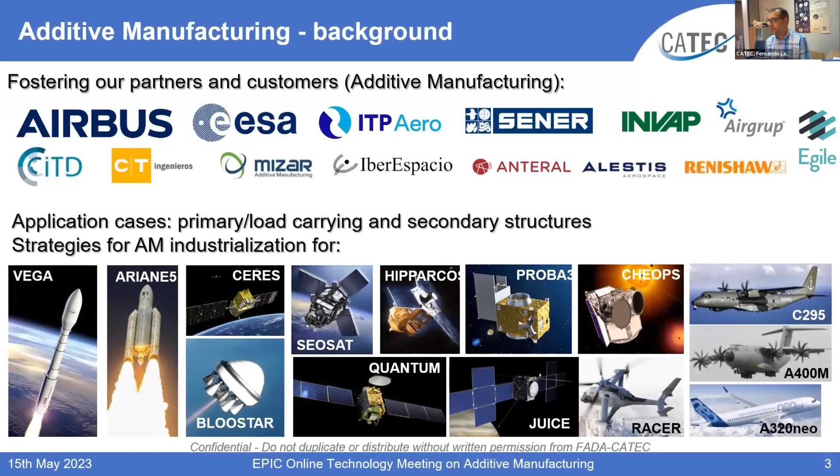As I said before, many for launcher applications, satellites, and also spacecraft. In the first projects, we were working on the validation and qualification of the technology, also producing functional demonstrators which have been validated at a high TRL. With this experience, we started to manufacture flight hardware, a few of which I will present today, not only in space but also in the aeronautic industry.

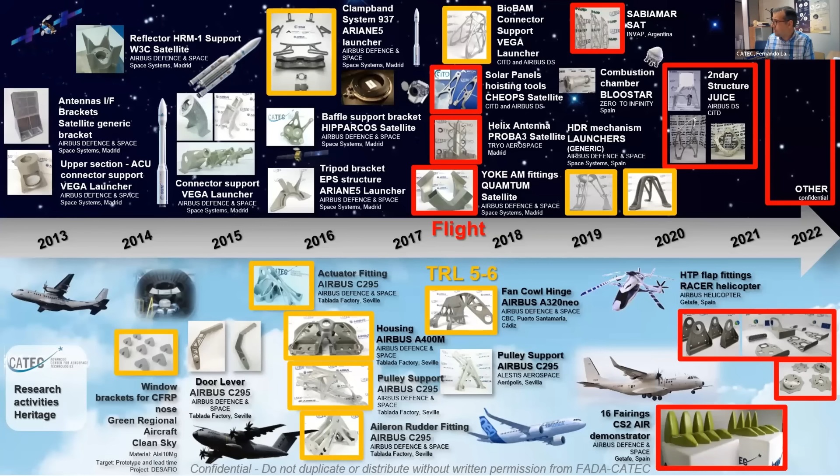For the last one, for instance, the first critical parts introduced in an Airbus rotorcraft were manufactured in the framework of a European project. Titanium parts belonging to the HTP fittings of the tail unit of the helicopters, also some other parts belonging to the secondary structure, or for instance different fairings for the Clean Sky 2 demonstrator, which is a modified C295 aircraft assembled here in Seville at Airbus facilities.

So where we are talking about additive manufacturing, of course there are many different processes. It's not only the manufacturing steps, it's adapting the design for all the process steps and the inspection as well. That's where we have a huge expertise.

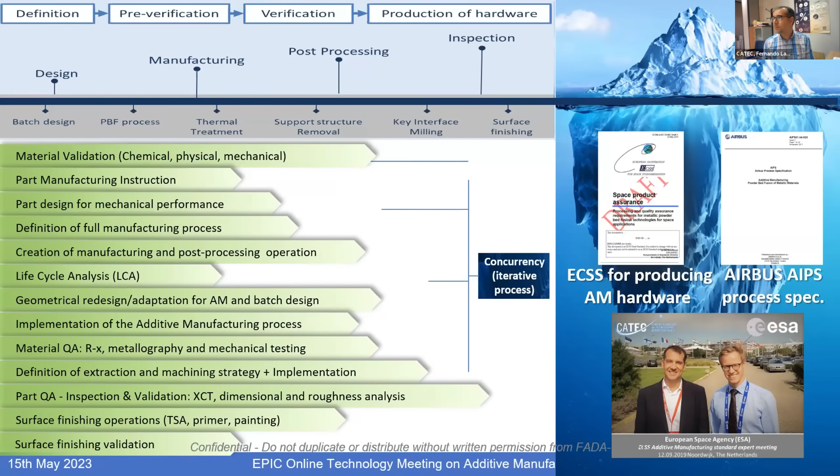For qualification and certification of the technology, there are many different issues which have been validated, and there's quite a lot to do also related with post-processing, because at the end you have to demonstrate that you have the capability for producing the complete value chain and delivering hardware with the required quality.

So now if we think about what has been done in the sector in the last years, basically you can find different standards which are coming from the space agencies. For instance, this one here is related with powder bed fusion manufacturing, also laser beam or electron beam technologies, in this case of course for producing space hardware. There are also different standards from NASA, which is another relevant space agency in the world.

And later, there are also many different specifications coming from the large OEMs, for instance, which will provide you more specific details, and most relevant is which will be the allowables for qualifying your component, in terms of mechanical behavior and so on.

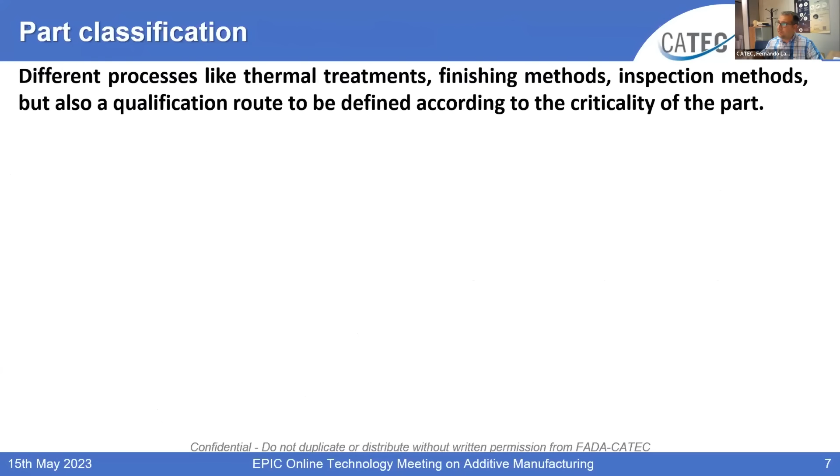So basically, there is a huge list of processes which must be addressed: of course the manufacturing, and then all the post-processes, the finishing methods, the thermal treatment, how parts will be inspected, and so on.

And all these processes and requirements will also be adapted according to the criticality of the parts. For instance, in space we have mainly four classifications: critical and structural parts, critical but non-structural, then non-critical but structural, and finally non-critical and non-structural. Basically, under this criteria, we classify the impact of losing a manufactured component on the space mission, how the mission is affected, how the spacecraft is affected, and in this way we obtain the final classification.

Similar to this criteria, there can be found some other requirements from the large operators, which basically refer to the same characteristics. So, a few examples of what has been done in the past.

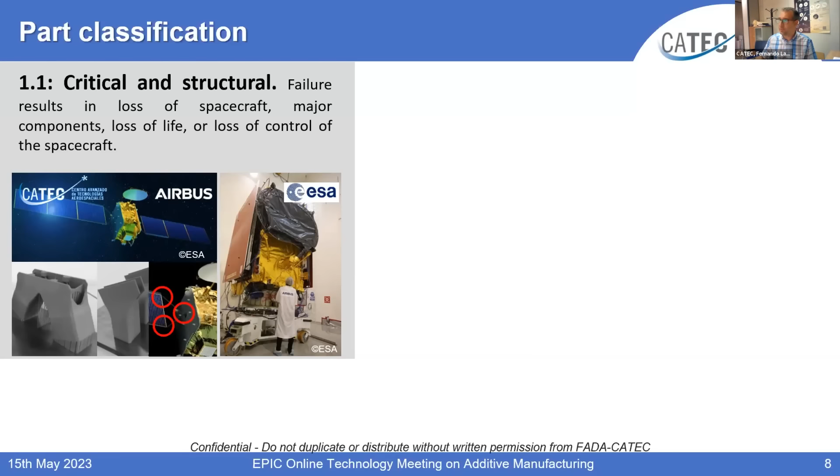First is the development of support structures for the quantum satellite, where, of course, losing those supports means that we lose the solar panels, so they are critical and structural, all these supports.

Then, in the case of the JUICE spacecraft, we have, for instance, secondary structure. In this case, we have the brackets, the supports of the mission sensor. So we don't lose the spacecraft, but let's say the functionality of the mission is of course decreased. So they are not critical but structural.

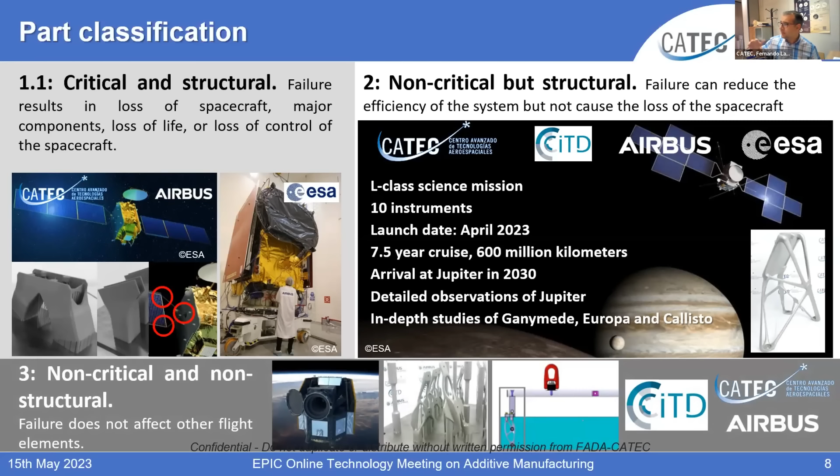And in some other cases, we have developed, for instance for the satellites, some non-critical, non-structural parts, which are basically part of the satellites used for assembly issues, but later they have no service during operation. Since they are attached to the satellite, they still have to be classified somehow.

Going to the process, we will work on different steps. First, we have to qualify our system. We have to produce different samples in order to check the characteristics of the material I'm producing. There will be criteria and requirements for tensile or fatigue testing, even in space, not a large number of cycles, but this is also criteria.

And then will appear some other characteristics like fracture toughness, also thermal conductivity, when we are developing antennas or products which require such kind of functionality. Also CTE - there are many different requirements we will apply, and our operator will define which are the allowables. For instance, which is the minimum tensile strength that we have to achieve in order to qualify our system. In this case, with many different issues.

Also, there will be some requirements related to the powder. And since this is raw material that we will reuse and recycle, there will also be requirements for monitoring, process monitoring of the reused powder and so on. So basically, the standard for ESA in this case will determine which process has to be monitored, and later the allowables are defined by the final customer.

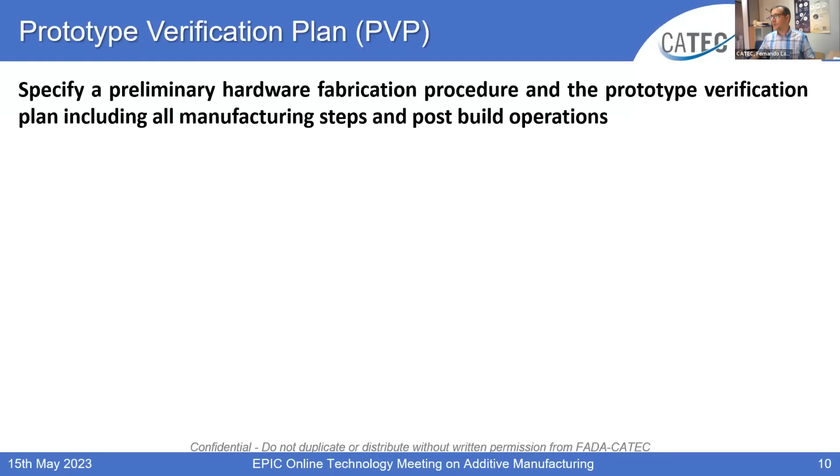So this is related to the qualification of the system, but then when developing a new product, we have requirements also at prototype level. Sometimes we can use the prototype for flying directly. It depends on many things - the maturity of your system, your experience, and also if there are similar parts that have been produced before. This is a negotiation with the customer.

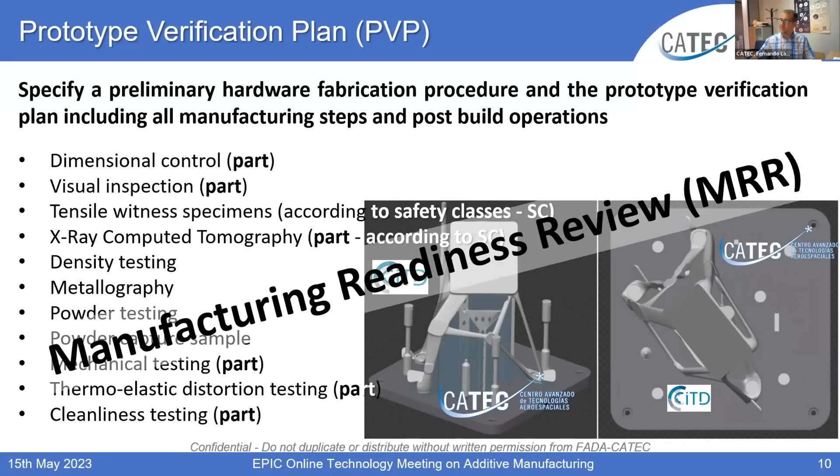And there we have to evaluate different issues, taking into account dimensional control of the parts. And then we will have to do mechanical tests just to monitor if we can reproduce the same mechanical properties and so on - this is a very important step. With this information, what I will pass is the so-called manufacturing readiness review, where I will specify in detail how the part is manufactured, how the system is controlled, how I will do the inspection, how the part is supported, which are the thermal treatments, and so on.

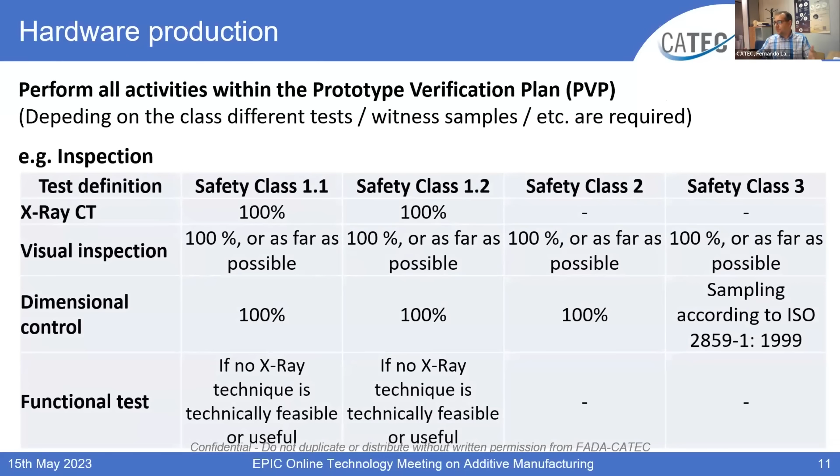Then I will have, for instance, criteria in terms of inspections, related to the criticality of the parts. Basic technology for inspection of metal hardware right now is X-ray tomography, and this is a requirement, for instance, in critical parts. There are different issues I have to cover. Sometimes I will need to do functional tests or not - that will depend on the criticality.

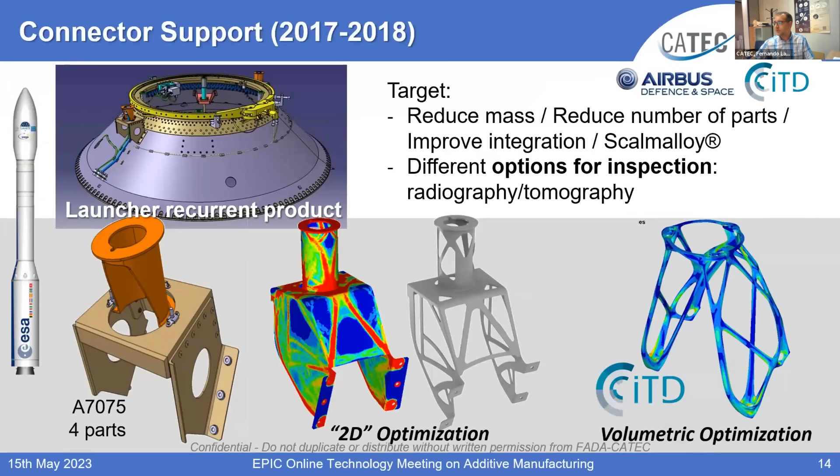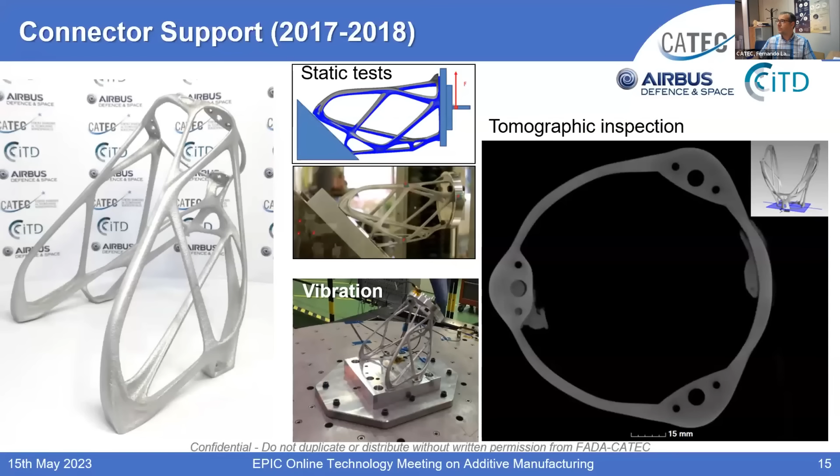This hardware was launched in 2021. Now also applying topology optimization in collaboration with CITD, an engineering company in Spain, we are able to develop this supporting structure made of scalmalloy, achieving a reduction of 50% in weight, and also reducing the number of parts from 4 to 2. It has been fully validated and qualified for flight with final tomographic inspection, for instance.

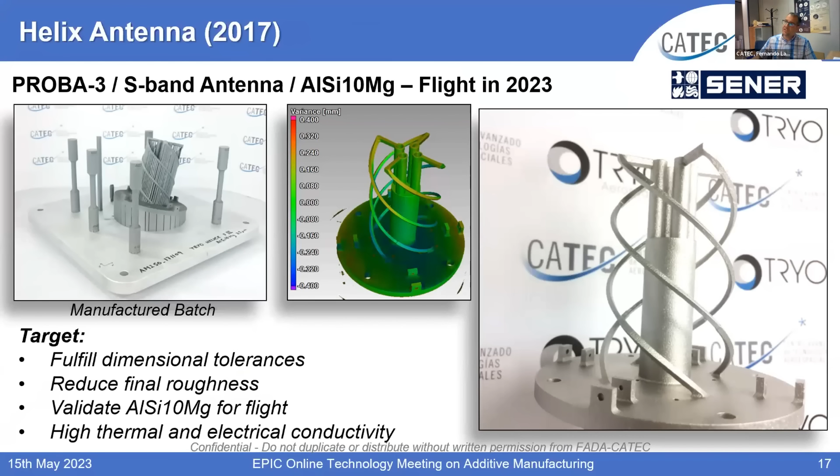Together with SENER, we have been working on the development of a helix antenna in aluminum silicon magnesium alloy, which is produced in one shot. Again, all post-processes must be warranted. You see in the image also samples which are used for monitoring the manufacturing, and finally going through all the qualifying tests - RF, vibration, shock test, etc. This is integrated in Proba 3 and will be launched shortly.

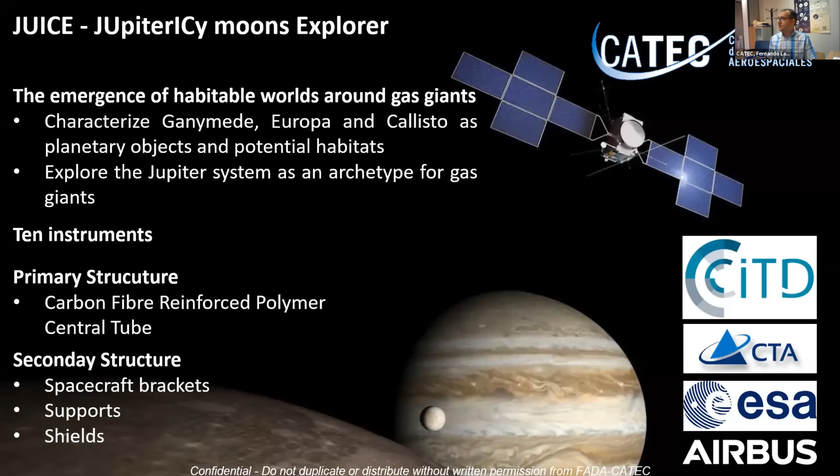I'm finalizing with what we have done for the Jupiter Icy Moon Explorer, which is one of the most important missions of ESA in the history of ESA, where we have manufactured part of the secondary structure. This mission is going to study Jupiter's moons, where we have liquid water, and with the possibility of finding life in the moons.

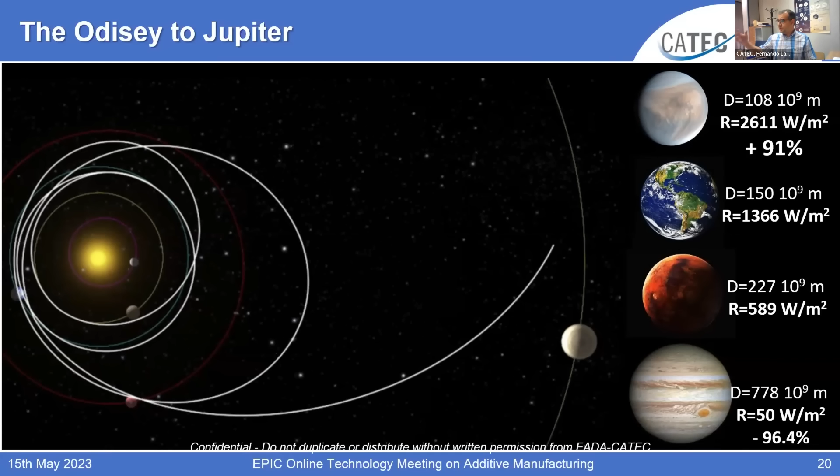And it's a very complex mission because it's using gravitational acceleration to reach the Jupiter orbit. For that, sometimes we have to come back to Venus, where we have twice the radiation than on Earth, but in Jupiter we have only 3% the radiation of Earth. So that means many very relevant thermal gradients, and also some Jupiter moons are magnetic, so we have to deal with that too.

In this case, we have manufactured the sensor brackets, many of them in Scalmalloy. It's a joint project we have done with the engineering company CITD, and also the reaction wheel brackets and antenna supports.

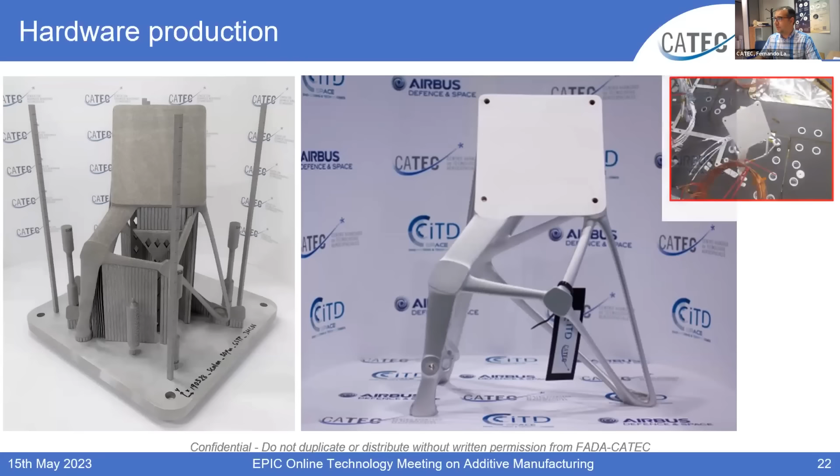So this mission has been launched last April, and now it's on the way to Jupiter. It will take 8 years to reach the planet. You see one of the supports of the sensors in the build plate, and after post-processing, also integrated in the spacecraft.

As I said before, we have the launch of the mission in April this year. So I'm out of time. I want to thank Epic and Antonio for the invitation, and I'm open to questions.

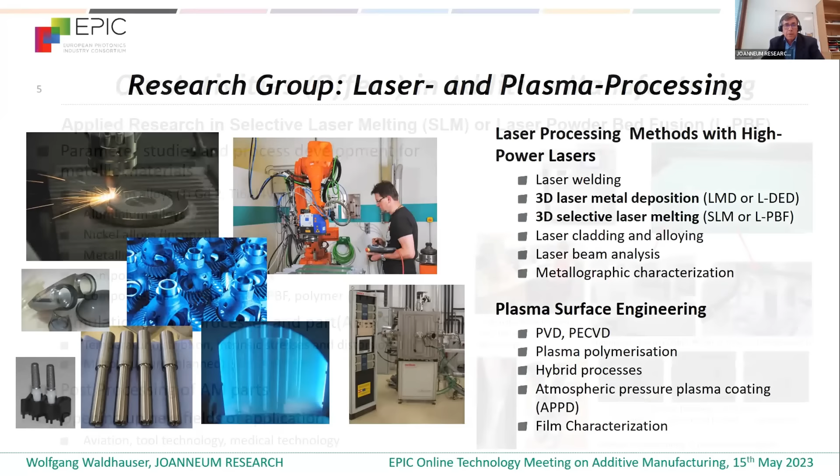What we are doing in additive manufacturing - we are doing applied research in selective laser melting. We are performing parameter studies and process development for metallic materials, for instance titanium alloys, but also aluminum alloys, nickel alloys. In the medical field we are also working on metallic glasses, a special zirconium-based alloy, and we are also doing, especially this is the next step for the future, working with composites, so a metal matrix with ceramic inserts, but also composite materials.

This is the combination of different additive manufacturing technologies, for instance for the metal, laser powder bed fusion, and then joining it together with polymer parts. This can be done with filament-based technologies. We are also doing simulations of additive manufacturing processes and parts, using ANSYS software, so we can simulate temperature distribution during the printing process. We can also get information on the intrinsic stresses and distortion of our parts, and also - this is planned for the future - to simulate the microstructure which we can achieve in our processes.

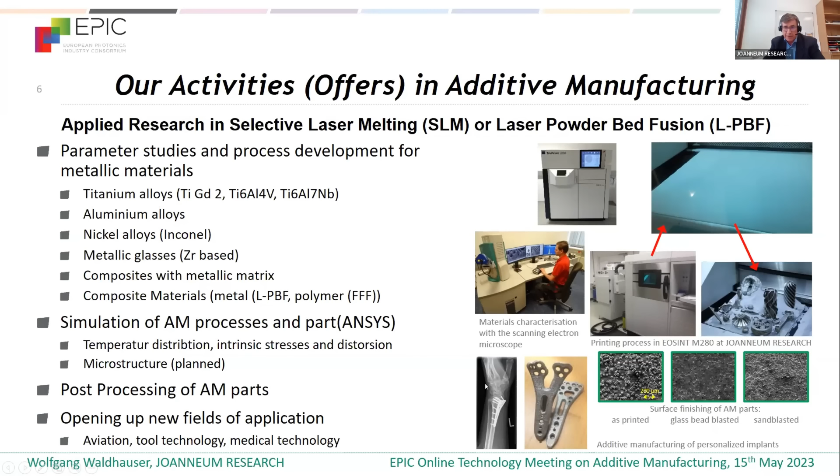We also have, as you can see here on the scanning electron microscopic pictures, activities in post-processing of additive manufactured parts. We can compare different techniques like glass bead blasting, sandblasting, together with partners. We are also focusing on electrochemical surface finishing technologies. Our main goal is always, because we are focused on applied research, to open up new fields of applications - aviation, as we have heard in the presentation before, then also tool technology, and I will focus in my presentation on medical technologies. You can see here, for instance, some radius plates printed with powder bed fusion, and here the application of these plates in the human body.

Important when you are working for medical implants is to consider the whole process chain. We are now in a relatively big national project for printing of medical implants, and so we are starting with the material selection. Then the next steps are finding the optimal printing parameters.

This needs very intensive characterization of the powders, but also of the microstructure and porosity of printed samples, and of course also to investigate the mechanical properties. Surface finishing and post-treatment, like heat treatment, is also very important.

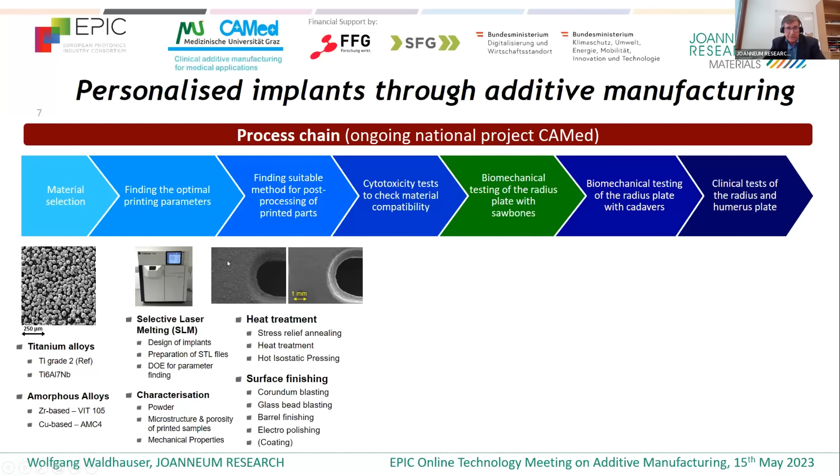So here, for instance, you can see the difference. This is the as-printed area of a radius plate, and here after electrochemical treatment, a so-called electropolishing process was used. Together with our partners in this project, the Medical University of Graz, we are doing cytotoxicity tests and other tests to check the

biocompatibility of the materials. In some cases also antibacterial behavior is important.

And then the next step is to perform biomechanical tests of printed radius plates. At first, this is done in a laboratory with sawbones, but then it's also planned to do it with human bones. And the last step is the clinical studies of such tests.

This is performed by our medical partners. And here in this project, which will be finished or finalized by the end of this year, the goal is the comparison of printed plates with conventionally fabricated plates, because such plates can also be produced conventionally with milling and so on. But our approach is to show that printing of such implants leads to the same properties and qualities.

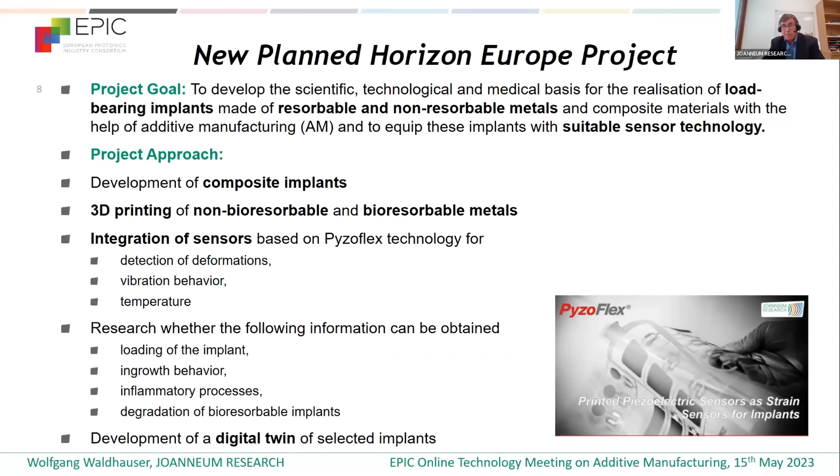And it is planned then to develop also a digital twin of some selected implants to get information for the future, and to develop very efficiently new implants, and of course also to know when it is necessary to change an implant or when there are some problems with the implant.

So what we are looking for, partners on the one side which are interested in the development of functionalized additive manufactured implants. We are looking for partners with expertise in finite element calculations. That's important for design of load-bearing implants. Then also experts in the production of metal powders from resorbable metals for medical applications.

We are searching for partners which are interested in our Pyzoflex sensor technology. In our project it should be used for implants, but it can be also used for other applications. In combination with the sensor technology, we are looking for partners with expertise in the realization of the electronics, which should be implantable, of course. To get the signals of the sensor out of the human body, it's necessary to have partners for RFID or NFC technologies, and also programming and evaluating the software for sensor data.

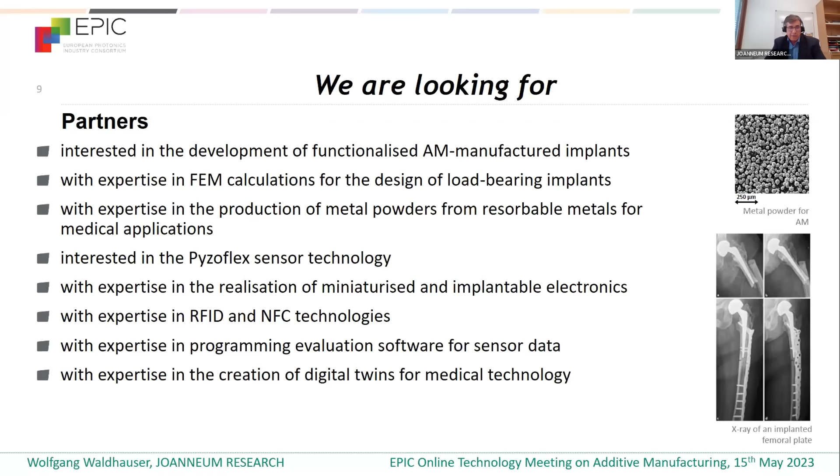And also we are looking for partners which have experience in the creation of digital twins for medical technology.

Here you can see the overview of our group. We are 26 people working in the topics which I have introduced to you. Thank you for your attention. I hope I was in time with my presentation, and I am open for your questions. I hope that we will find some partners and collaborations for our planned project.

It is planned to submit this new project next year. The call will open in autumn, and next year we have to submit the proposal in a two-step procedure. So thank you very much.

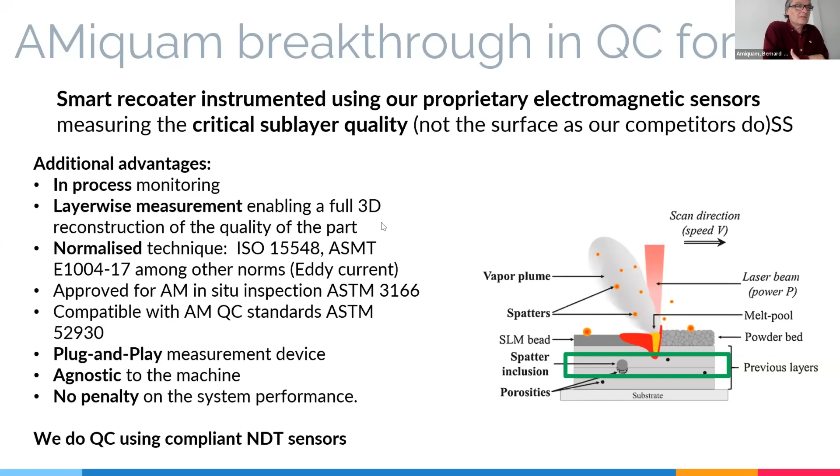So what is the technical challenge to do that? The technical challenge relies on the fact that additive manufacturing chambers, so deposition chambers, are a confined environment. It's relatively restricted, it may also be an ATEX environment. Oh, I see there are some issues with my presentation. It's a confined environment, so you want to enter into the machine.

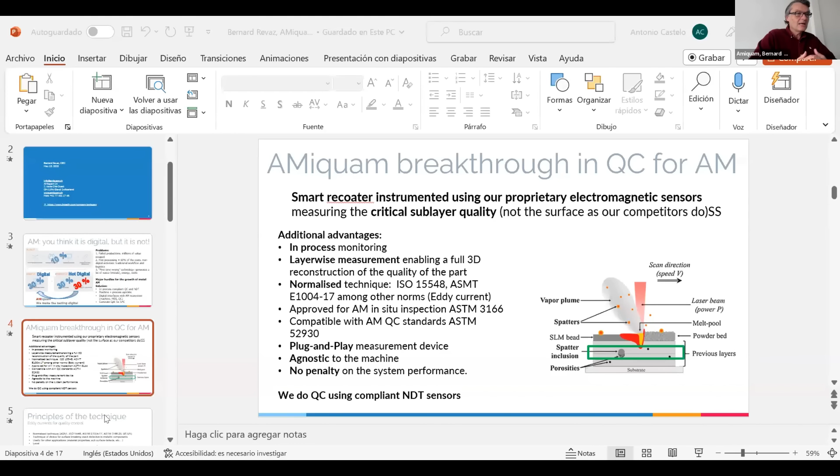It's also nice, the description we had before with Silios about working with the laser beam. We want to do something similar: add some hardware in the machine and enable a new functionality, a new characteristic of the part, to be measured during the fabrication. So you can go to the next.

The challenge for the integration is to keep the machines and the process unaffected by the presence of the system. So what is the system about? It's about an electronic module.

We're not affecting the airflow, the gas flow, inert gas flow. We're not touching the powder. So the system performs and works as designed without our system. We're just adding some information by having the sensors flying over the part.

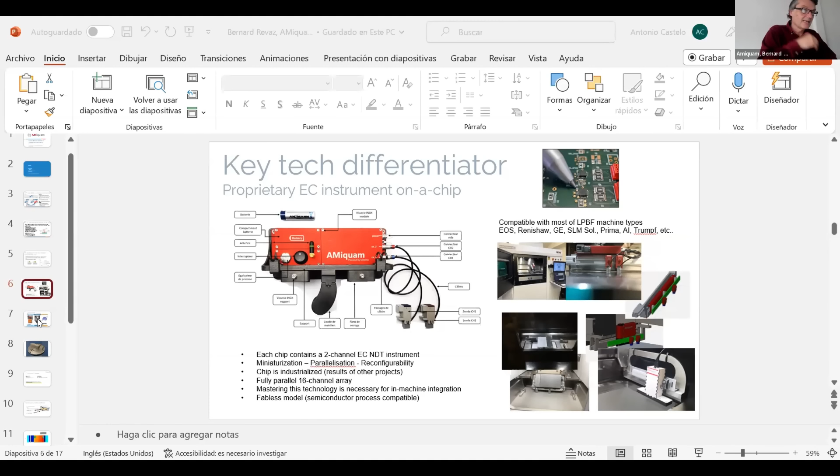So I'm going to show you now a few pictures, and that will be it for my talk. We claim that this is the first part. This part that you see at the center is a parallelepiped, 14 centimeters in length and 4 by 4 centimeters in the other dimensions.

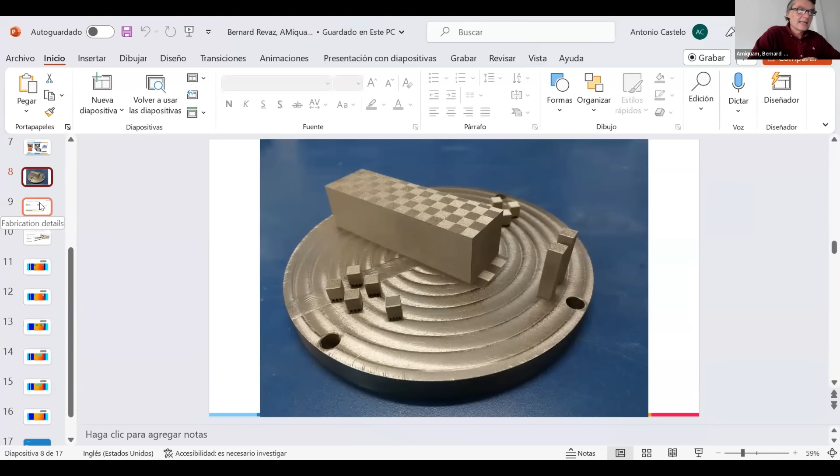And inside this part, if you go to the next... Yeah, so inside this part, for certain reasons, our customers wanted to have certain defects by design.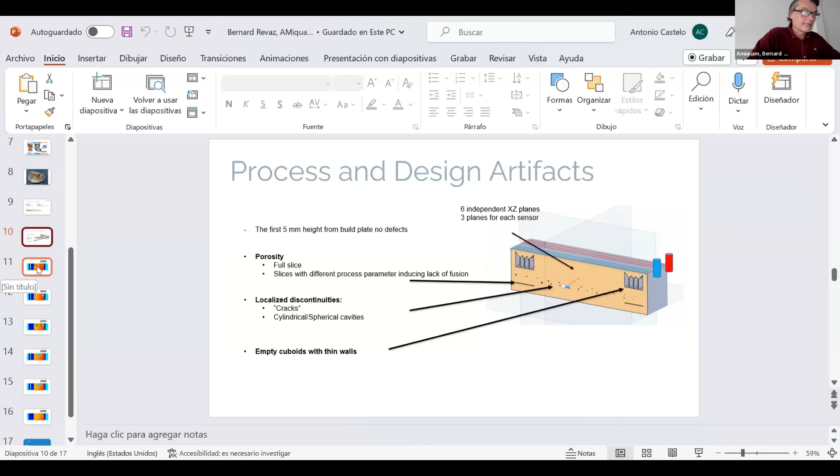And so with this type of measurement, we really enter into non-destructive testing and the possibility to test the part. A lot of things have to be discussed, but I wanted to present here the fact that from a technology point of view, we are not far at all.

Now the question is how we integrate that into the procedure, how we can talk to level 3 NDT inspectors in your companies or partner companies to discuss that with them, and also how we can interact with the OEMs. We talk to most of them now to make this possible. Thank you very much for your attention.

I'm Agnė Butkutė from the company Femtika. At Femtika, I'm leading the contract research service team, and right now we'll be switching to a slightly different topic than the previous presenters, because I will be talking about microprocessing of transparent materials and microfabrication. You will see that the scale will be much smaller than with the previous presenters, but first let's start with a few words about Femtika.

Femtika is quite a small company, around 30 people. We are located in Vilnius, Lithuania, and we're a spin-off of Vilnius University. I think tomorrow we'll be celebrating our 10th birthday, so happy birthday to us. Let's start talking about the main topic.

In general, Femtika provides femtosecond laser-based microfabrication solutions. By using a single laser source, we're able to do a few different techniques. Just by tuning the laser radiation intensity, we're able to do multiphoton polymerization, which is an additive microfabrication technique that allows us to fabricate 3D structures out of polymers. By increasing radiation intensity a little, we're able to do selective glass etching, which is a subtractive microfabrication technique, but in that way we're able to make arbitrary shape structures out of glass.

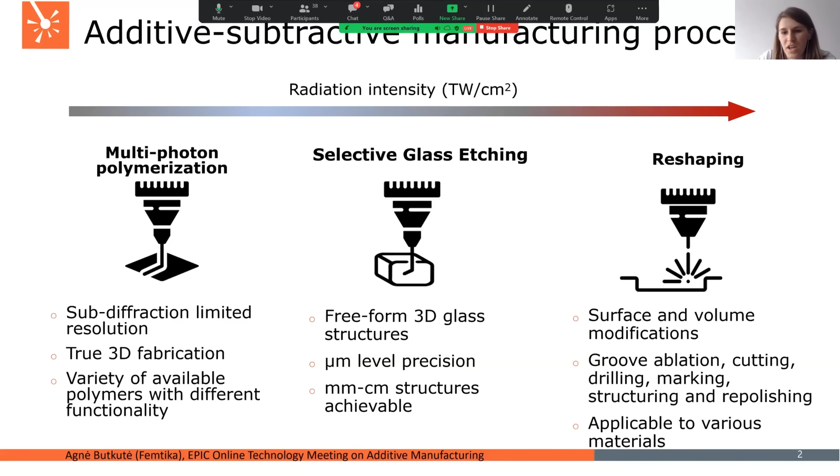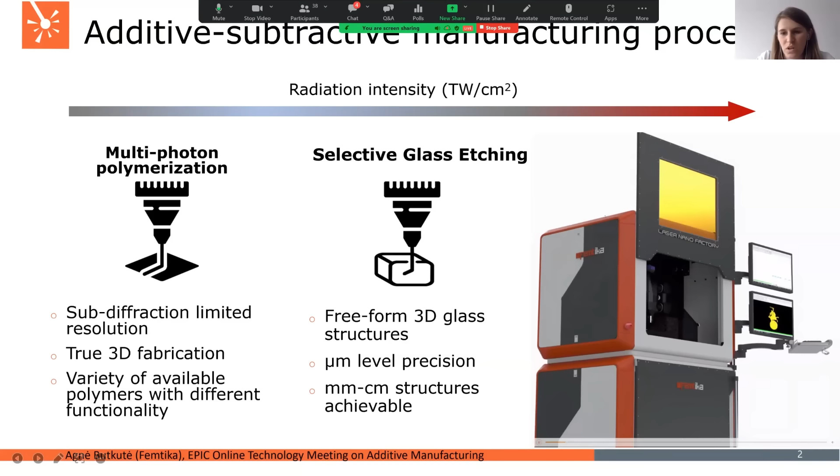With higher intensity, using the same femtosecond laser source, we're able to do reshaping—some kind of ablation, marking, or structuring of various materials. All three technologies are combined in a single workstation called Laser Nanofactory by Femtika. This workstation is equipped with a femtosecond laser source, very high precision positioning stages, and galvo scanners, and it's suitable for all three types of microprocessing.

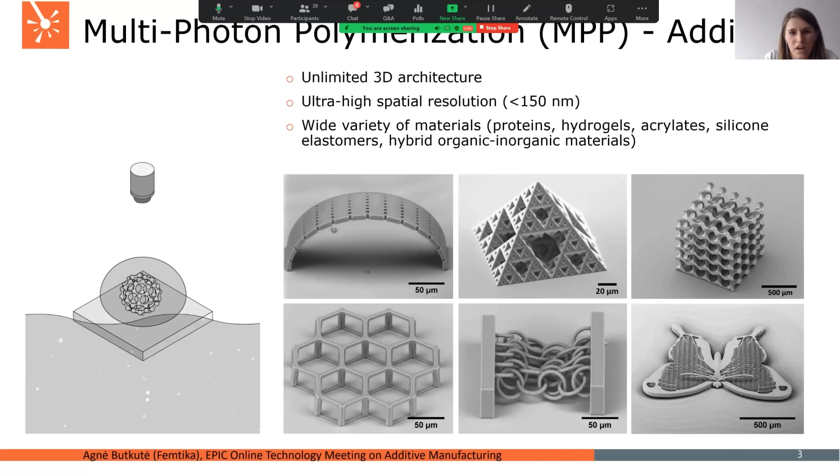I'd like to talk in detail about a few of these processes. The first is multiphoton polymerization. In the animation you can see that just by using a focused laser beam, we're able to inscribe modifications in a polymer drop. In general, we're polymerizing material in the volume. Later, we need to develop it using organic solvents, and in that way we're able to produce unlimited 3D architecture structures out of various polymers, with quite high spatial resolution, up to 150 nanometers. As you can see, the possibilities for 3D architecture of the structures are quite wide.

Using the same system, we're also able to do a different technique called selective laser etching. The process is quite similar, but we need to inscribe nanogratings inside the volume of glass, also using a focused femtosecond laser beam. After that, those inscribed nanogratings are etched in aggressive etchants such as KOH or HF, and in that way we can create various 3D shapes in the glass. Usually we use fused silica glass, where the surface roughness could be down to 200 nanometers.

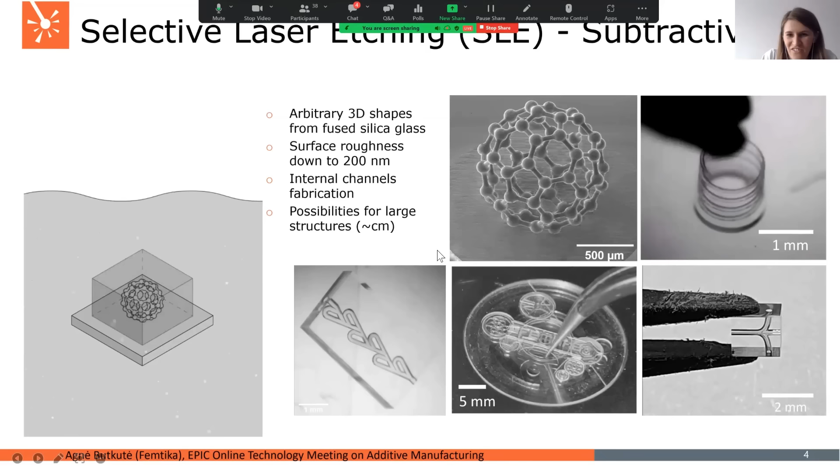One of the most unique features is that we're able to create internal channels inside the volume of glass, meaning we don't need any additional sealing process. This technology can be applied from micrometer-scale structures up to wafer-scale production.

As you can see, for microfabrication, multiphoton polymerization is an additive technique, while selective laser etching is subtractive. However, the possibilities are quite similar. In the picture you can see a 3D fullerene molecule model—one fabricated using multiphoton polymerization, the other produced using selective laser etching. This shows the quite unlimited architecture possible with these techniques.

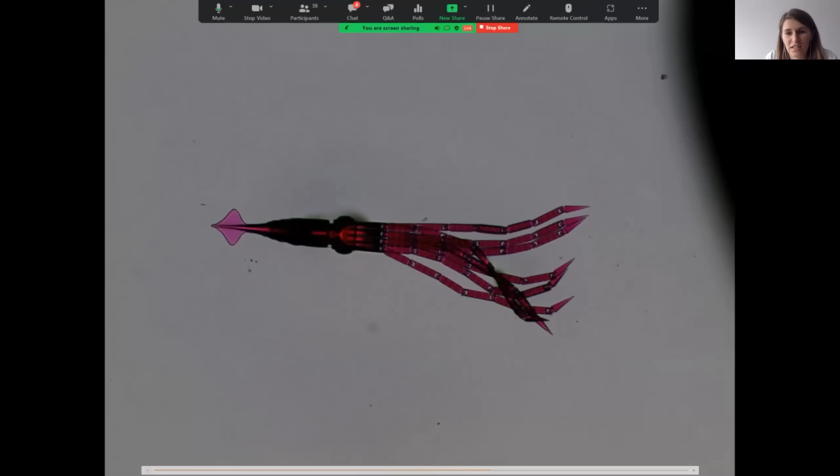Also, one interesting feature of these techniques is that we're able to produce even movable structures which do not require any additional assembling process. Here you can see a polymeric structure which was just polymerized, and you can see that the tentacles of the squid are moving freely in the water.

Another example is a glass structure called the Geneva mechanism—again, a structure made directly out of a single piece of glass, just by inscribing the modifications. We place a magnet on top of the mechanism, and the whole mechanism is placed in an external magnetic field, so that the movement of the structure is kind of automated. This just represents the possibilities and shows that these techniques are quite suitable for various micro-robotic solutions.

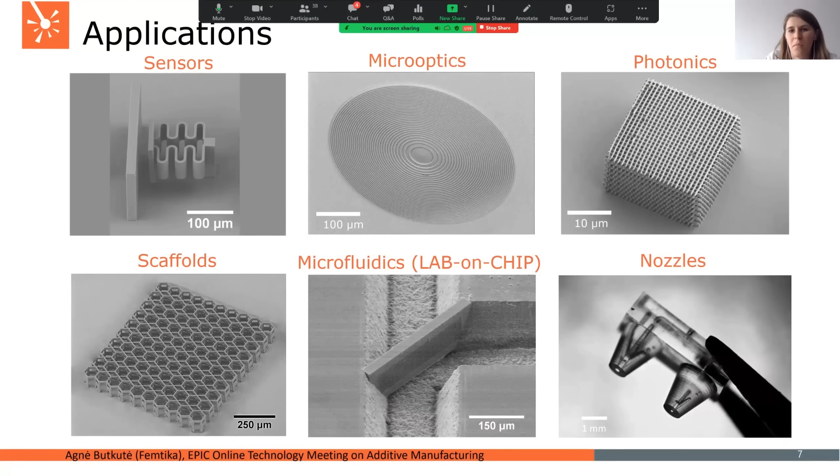Of course, the applications of these techniques are quite wide, starting from sensors to micro-optical components, such as lenses. Here you can see a Fresnel lens, and of course, photonic crystals.

Also, multi-photon polymerization technique is suitable for scaffold manufacturing, for cells growing. Also, here you can see a nozzle made out of glass, and channels fabricated inside the volume of glass. These techniques are quite good for microfluidics.

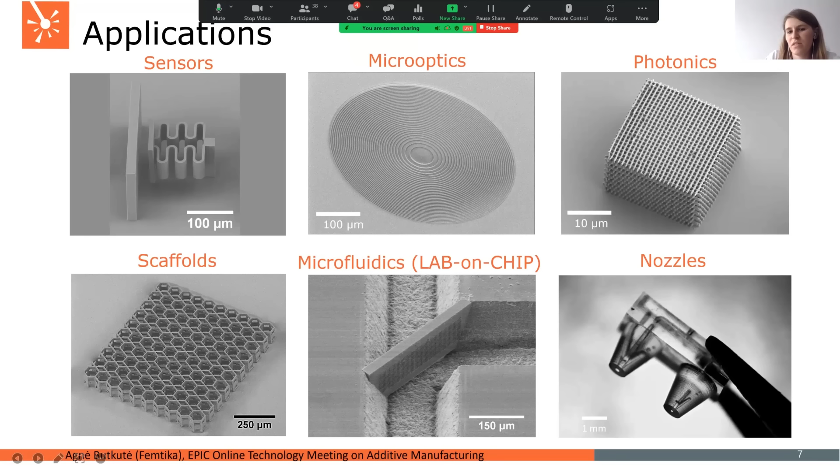Here you can see an example of hybrid microfabrication, because hybrid means we're able to use a few different techniques in a single device fabrication. This is extremely valuable for microfluidics, where we need to fabricate a channel. The most efficient way is to remove material from glass, so this is the ablated channel on the surface of glass, and later we can integrate a very precise polymeric filter suitable for filtering.

Another example of a lab-on-chip device: this is a microfluidic chip created to serve as a liver-on-chip. This chip consists of 3 separate channels separated by a pillar-type filter, fabricated together with the channel out of glass. The center channel was tested with liver cells, grown there, so we're able to test how real tissues react with different solvents and materials introduced from the side channels.

This device can also be called hybrid, because we needed to connect a few different techniques. One was selective laser etching to produce the channels on top, but we needed to encapsulate this device, so for that we used a laser welding technique, welding the cover slip on top to seal the fabricated channel system.

As you can see, the possibilities of this hybrid fabrication technology are quite wide. So if you have any crazy ideas, please contact us, and we will be waiting for your challenges. Thank you for your attention.

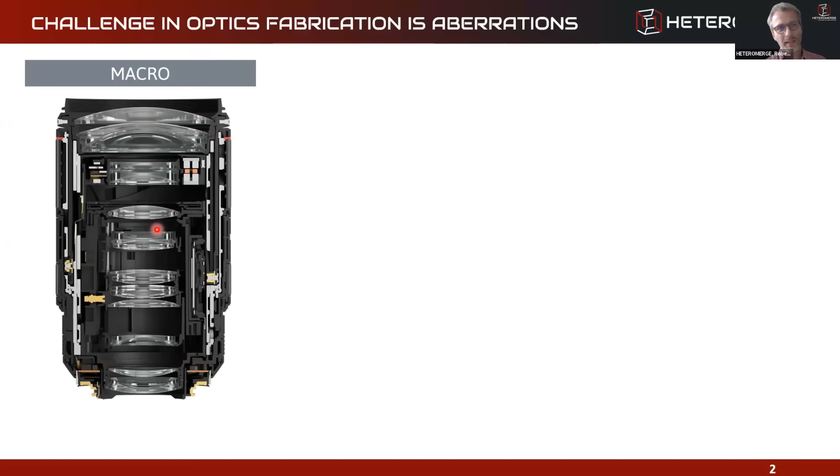And then we said, I think we can do the same thing again, we as mankind. And we made the same thing, very similar, for micro or millimeter scale optics in our smartphones. We do the same trick: we injection mold glass or polymer lenses. Now the shape gets a bit more crazy, more aspheric to deliver the optical images. But still we take discrete components, assemble them together in a barrel, mount them, and that's it. And we have good image quality.

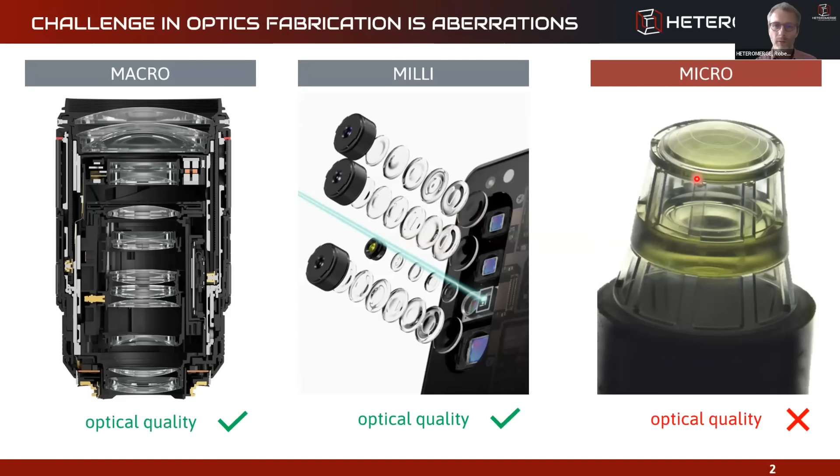The thing is, we always want to go smaller, and the next step is to go for really micro optics that could be on an optical fiber and form a super small endoscope. And here the problem is, slowly it gets challenging. You cannot pick and place these very sub-millimeter, hundreds of micron lenses, assemble them. And to get good quality, you still want to play the same tricks, you want to use different materials. Now the thing is, you cannot use different materials in this printing process so far, so you are basically limited in the optical quality. Doing chromatic correction and focus improvement by composite optics is very challenging. And what we try to provide is a solution for this issue.

And we see, if we wrap it up in a broad view, where are the applications? We see these in medical imaging, so a very small endoscope on the tip of an optical fiber, diameter of a human hair, that can basically go into the smallest arteries of the human. But also smart glasses that do not look like smart glasses, they just look like normal glasses, but have the optical engine and everything integrated. And they are so small and compact because we have a fabrication technology, printing for these optics of different materials, that can make a very compact optic that is very resourceful with the photons, so really efficient.

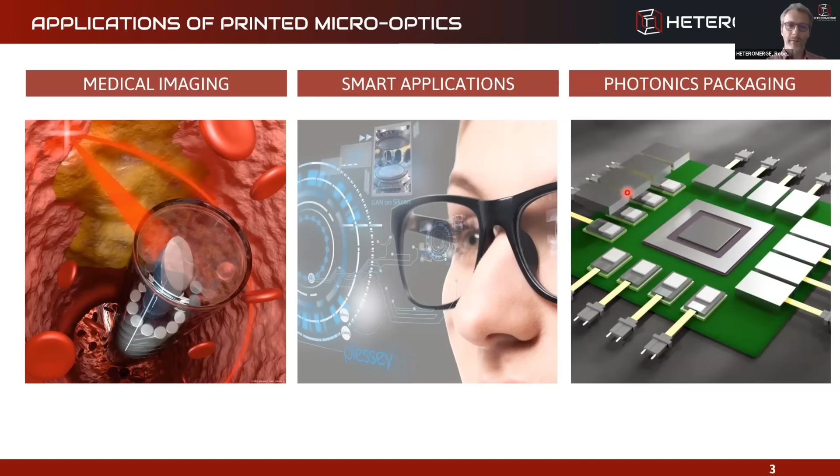And the other thing we're also using every day, basically without knowing it, is the data centers where from optical fibers, data is converted to electronic chips where it is still processed and computed on. And what we want to have is the fibers to come closer and closer, ultimately directly onto the chip. So we need very small integrated optocouplers that are very high efficiency. And this is where we see printed optics with different materials playing a role.

Now, the good thing, and thanks to Agnė for the nice introduction, is that I don't need to explain the technology behind this, but let me show you this picture. We will see this again, and it's important to understand. So what we have in this case is a 780 nanometer laser focused through a high magnifying objective into the liquid. We are working in immersion, so the objective is immersed into the liquid, and in this focal point called the voxel, the curing element, above the threshold, the polymer cures, and you have basically a very fine pen you can draw through the polymer and make a freeform 3D structure.

So far only with one material, but the quality of the prints we saw before is superb, is crazy. And it was used a lot for mastering optics. You create a master structure, you replicate this into a working stamp, and then you replicate this further into your working material. You can be very cost efficient by that, because you can do this in mass production. The challenge is if you want superior optical functionality, you need different materials.

So far, at least, there's no way to do a replication with different materials. What you can do is stacking, but as explained in the beginning, if you want to stack very small elements, it gets really challenging.

So what we thought is we take this droplet, we have the objective immersed, we focus the laser into the material, and we print. This is a dummy structure, a church here, you'll recognize it later. Up to a certain layer, we really print layer by layer.

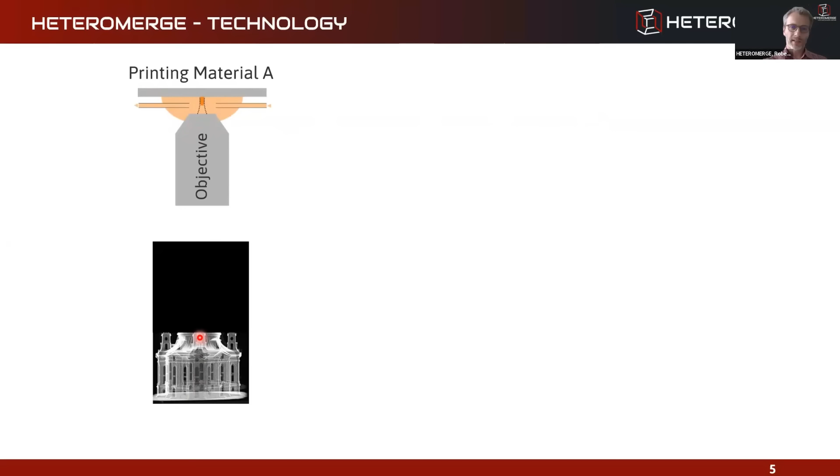You print the structure up, and at a certain point you decide it's time for a new material. It will be the cupola for this church, or can be another lens in your lens stack, or a mechanical structure that supports the lenses, or a black aperture that blocks stray light, etc.

So what we do is we inject liquid. This is now the key thing. We have a print head. We inject the liquid into this droplet basically, and synchronized, we remove the excessive liquid. So if you look on top of it, you'll see it's a very small scale printing. This is an objective about 40 millimeters in diameter, and we have a liquid droplet on top.

We inject, to see it better here, the red liquid. It is passing through until the exit. Down here's the entry, up here's the exit. And after a certain time, all the material is exchanged.

Now the key is the laser, in principle, that is working here - it does not know anything about this material exchange. It was just switched off, materials exchanged, and now the printing just continues. It continues basically where you stopped it. This is the key point.

You print in a different material. The top part is a different material, a lens or something else, but the lateral alignment is perfect, nearly perfect, because you just continue where you stopped. There's no relative movement between the printing substrate and the objective.

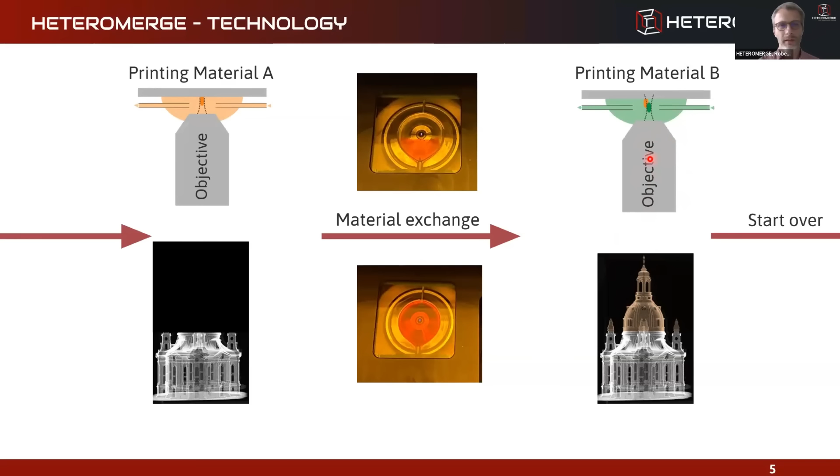So you can start over. You start with a third material, or you go back to the first material, depending on your needs. That's not just a vision, it's really existing.

And here's the key point: you're not making printers, you're making print heads. You can imagine this a little bit like desktop printing when color printers came across many years ago. You plug in your cartridges with different colors. Basically what you do is you have a print head that also plugs in different materials, different colors, if you want to say so.

So what it is in this system, that is what we have in our lab we are using, is the Nanoscribe GT2 system. And this is what comes from us - this is the electronic box that regulates the pressure and the vacuum. Obviously, you drive the liquid into the print head with pressure, and you remove the excessive material with vacuum, because it's an open fluidic system, and there's more advantages of that. I will cover that later.

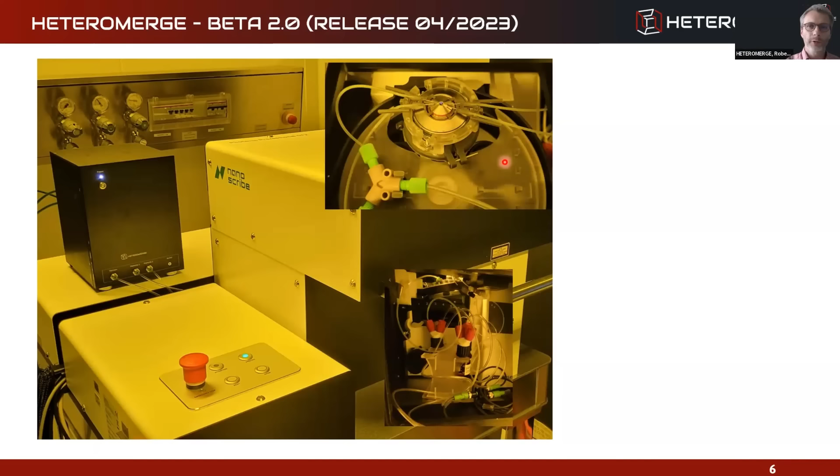So what is inside is basically more interesting and the magic. This is the patented technology. We have the reservoirs inside the system, so it's all very, very conveniently arranged. The liquid is coming from the reservoirs onto the print head. And that is how it looks like - we have mounting plates down here for distributors, for flow sensors, for valves, for clamps, etc.

What you see here is now a prototype in a 3D printed material, but for the customer solution, because we are changing a lot with the design, it is in aluminum. We have these needles on top, and it's a slightly different design - you'll see in the video soon. Basically, we have injection from the right side here, and then extraction from the left side. And this is the objective, the stainless steel that comes with the tool.

We mount the printhead in an efficient way, and it can be removed anytime if you don't want to use it. If you zoom in, you'll see the process shown in the picture before, where we inject the material. There's no printing yet, as we exchange directly for the next material, the transparent one.

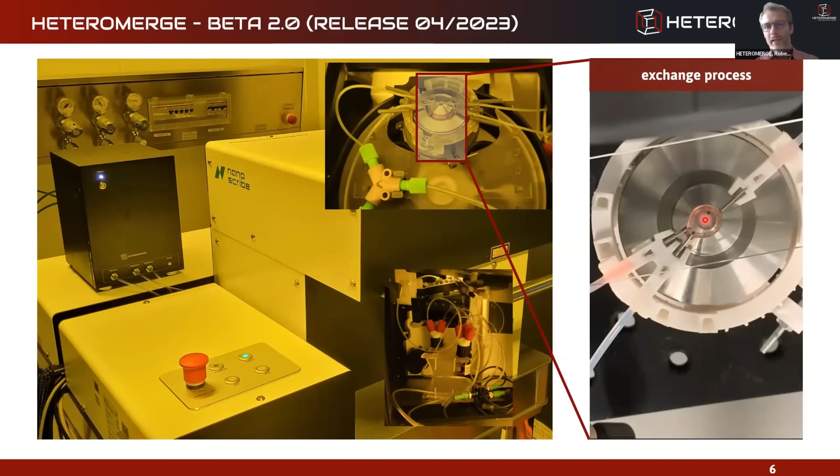So you can cycle between, in this case, transparent and a red material. The red is a laser dye. You can go back and forth and sequentially print different segments of your complete structure in different materials.

Now, the key benefit is that it's automated, whereas the gold standard so far has been manual exchange of material. We think we're about 10 times faster with this automated process, and of course it requires less labor resources to do the exchange.

With a very precise piezo that keeps the system at plus or minus 10 nanometer accuracy positioning, you get about 100 times more precise placement—for example, placing the red cupola on top of the blue basement. That means down to 50 nanometers and below in placement accuracy.

What you see here is basically where red and blue meet. Here you see these openings, windows in the real model. There's absolutely no lateral shift—it's perfectly placed onto each other. That's the best thing you can potentially do when joining prints together.

As I mentioned before, it's a substrate-independent solution. Wherever the laser printhead goes, our printhead will follow. It's an open fluid system, so we can work on small structures or large wafers, up to 100 millimeters so far—that's large for us, because that's what the system provides.

It can also be used on active devices—edge emitting lasers, vertical emitting lasers, LEDs, or optocouplers as connectors. Because it's open, you can basically go everywhere and print everywhere.

Since time is running a bit short, let me summarize. I'll give two examples I can share here from first customers. The system is in a pilot phase, a prototype configuration, with a few customers testing and jointly developing with us this year. From next year on, it will be available for anyone willing to test the system.

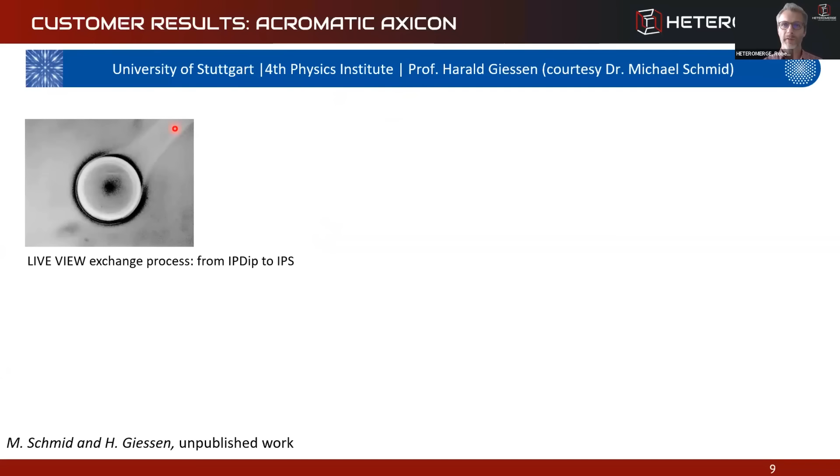One of our very first pilot customers was the University of Stuttgart, at the Fourth Physics Institute, Professor Harald Giessen. We're very happy to share some of the results here, which are going to be published soon.

What you see here is a negative pyramid printed section, with a pyramid and a cone printed into this negative pyramid. In the top view of the printing, you're looking into a bowl or depression that was printed from the first material—a commercial material, IP-Dip from Nanoscribe. Now you see this IP-Dip being washed out by IP-S, a different refractive index material.

That's why we want to combine it. You can see the stream of material going out—the injection goes from left bottom to top right. Over the course of time this disappears, and at some point all the material is washed out. Then you can print this top part with the cone and the pyramid.

This gives an achromatic axicon—basically a rotationally symmetric prism that will normally split light into colors like a rainbow. But with an achromatic axicon made of two materials put together, you get a color-corrected axicon.

This demonstrates that with this high precision—printing the bottom part, changing the material, then printing the top part—you can achieve broadband chromatic correction for this optical element, which is very interesting for many optical applications.

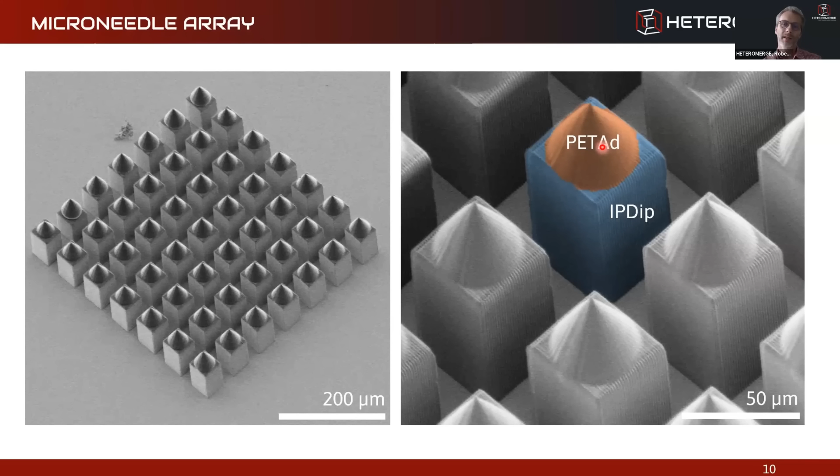This is very interesting for applications like transdermal microneedles or for drug development and tissue engineering, where I want to print different materials. So far we are talking only about different optical or refractive index materials. We can also think about stiff and rigid materials, biocompatible or non-compatible materials, cell-loving or cell-non-loving materials, hydrophobic or hydrophilic. We can combine many different materials in one print, with the advantage that we join them basically in situ together.

So to wrap up, I think we saw 3D printing is there in industry, and we think two-photon polymerization or multi-photon polymerization will be in industry in 2 to 5 years. It's now entering industry, optics fabrication, and with multi-material it gets even more opportunities. We think it will move soon to industry.

So we developed this add-on to existing printers. We provide this add-on and system that does the material exchange. What we offer is the full system, the full technology, and also the service during the existence of the tool. We also offer, for those that want to enter this field and don't have their own printer at the moment, feasibility studies together with these potentially new customers.

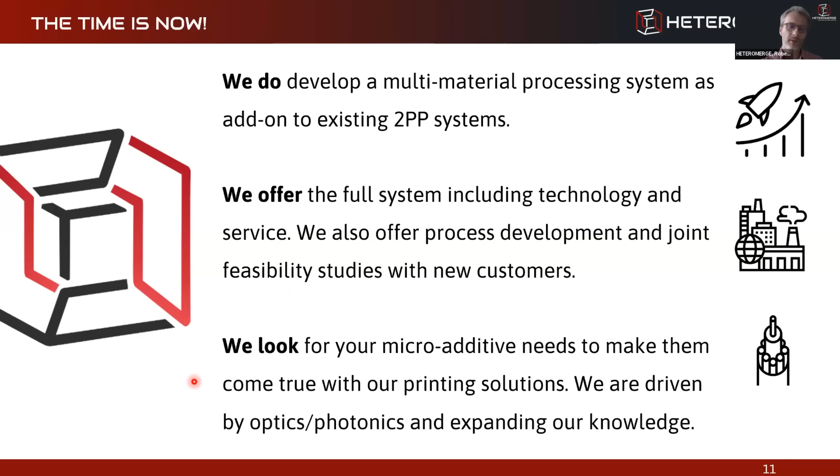We do process development, joint development, and materials testing to help get started with this technology and create a low barrier to entry. So what we're looking for are partners interested in micro additive polymer fabrication, combining different materials. At the moment we are very much optics and photonics driven, coming from that direction, but we are eager to expand our knowledge and partnerships into other fields like bio applications, MEMS, materials, etc.

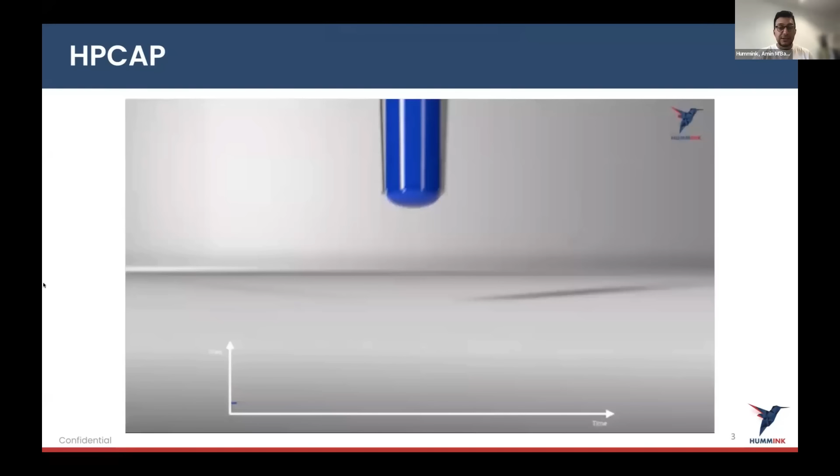Okay, so I'll show you a quick way of how the technology works. It's called high precision capillary printing, or HPCAP, and it's based on an oscillating macro resonator. It's a tuning fork that you can find also classically, like what a musical tuning fork looks like, and it constantly oscillates. The glass tip attached to it, and the glass pipette, is filled with the ink of your choice.

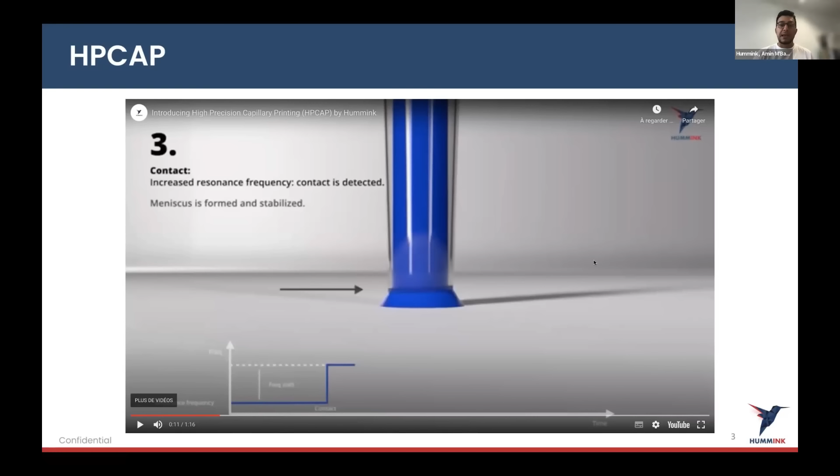Once you get that ink in contact with the substrate, the resonance frequency of the tuning fork is going to change, and you detect the exact moment where you have a drop formed between your substrate and your tip. That's the meniscus. Once that happens, we don't apply pressure, no UV, no laser. It's strictly based on the strength of capillary forces at these resolutions.

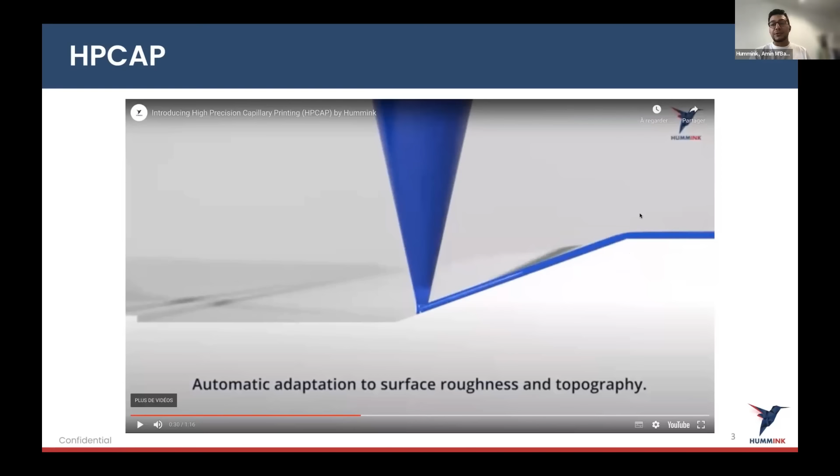So you can do drops like that. If you go up, the resonance frequency comes to its previous value, and you just duplicate that. So it's not a drop on demand, but rather continuous printing, as you can see. We move the substrate below the tip, and we are able to constantly sense the substrate, so it adapts to the surface roughness and topography of the sample, because like a blind person's cane, we are actually always sensing the surface to know exactly where it is, so it automatically adapts to the topography and roughness.

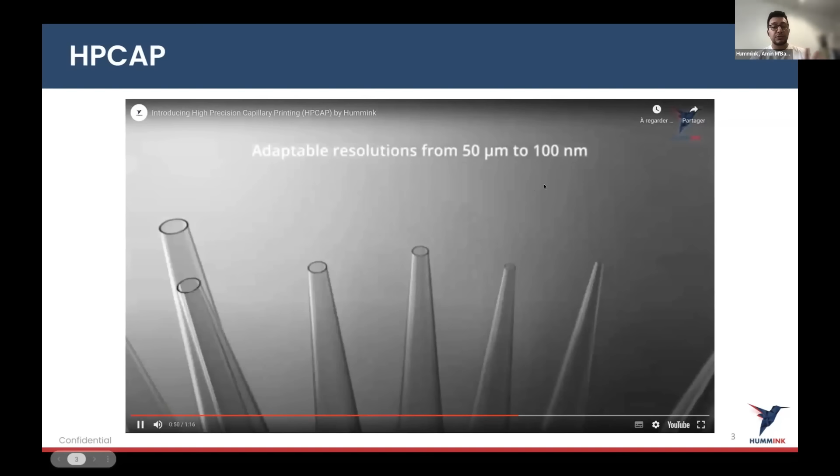You can use a wide range of inks. We're working on multi-nozzle options, with huge freedom of design. It has 20 nanometer precision, and doesn't generate satellite drops, so it's very efficient to make repairs for circuits that have defects, or for printed circuits in general. At resolutions that can go from 100 nanometers to 50 microns, you can deposit really any ink, and those are the glass tips I was mentioning before.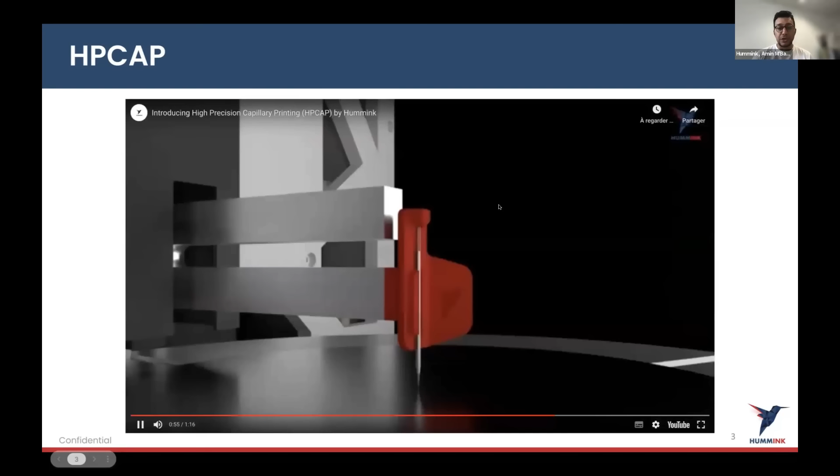We pull those glasses, and it creates different diameters, hence different line widths. Once you've done that, you can very easily change the tip. This is just a set of examples of what we are able to print, and we conceive the technology as an independent printing head that we hope we will be able to integrate into other equipment manufacturers' machines, because we don't manufacture anything by ourselves from A to Z. So we need other people's substrates to use our technology.

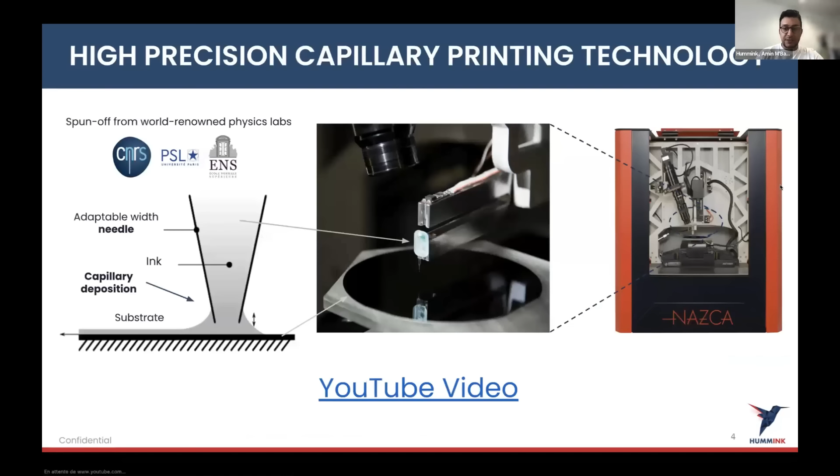So I'll skip this slide, as you know now how the technology works. But as I was telling you, you have unique freedom of design with the technology. You can print silver, copper, gold, graphene, as long as you can make an ink out of it, which makes a broad range of possibilities. You can deposit that on any surface, because we don't apply electric field. There's no polymerization. So really it works like the smallest fountain pen in the world. You come in contact and write.

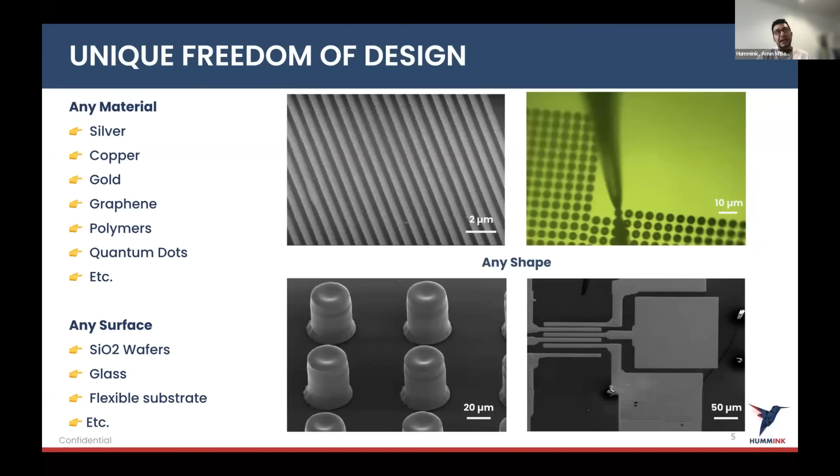You can also do some small 3D structures, like these bumps, very useful for advanced packaging applications. Waveguides that you can see on the top left - the smallest waveguide pitch that we did is around 400 nanometers. You can make dots, and also devices with very narrow gaps for increased electric field between interdigitated electrodes - we've gone down to 300 nanometers or 200 nanometers for that. So a huge electric field.

So the limitations that we have, trying to anticipate that question a little bit, mostly concern the ink. The rheology - you have to consider that, even though we can go up to 100,000 centipoise. Particle size, if you have any, to prevent clogging of the pipette - we respect a 10% ratio between particle size and the line that we deposit. So we also manufacture our own ink to meet the requirements of the technology.

And obviously, since it's a capillary-based technology, surface energy is very important - surface tension, contact angle of your substrate. We know how to adjust these three elements to be able to make the ink that works with your application.

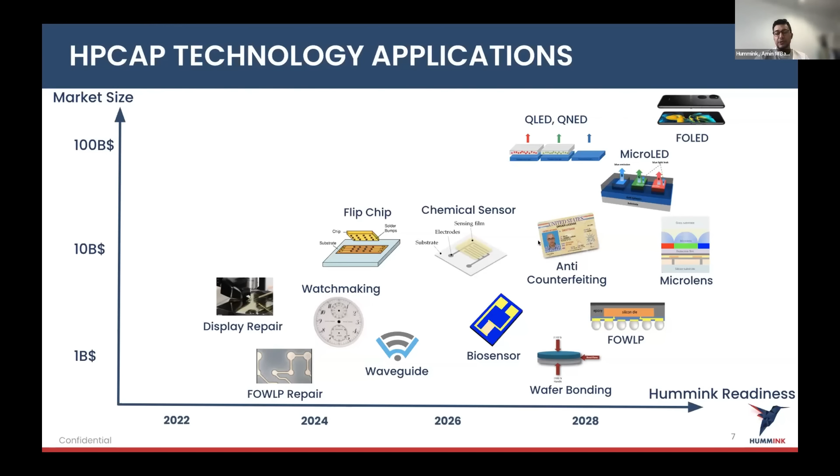And what we hope to do with this technology is tackle a wide range of markets, but as of today we're focusing on what is not very high volume manufacturing, which is display repair. There are lots of displays, but the number of repairs you have to make is not substantial, and we can reach that. Wafer level packaging and watchmaking too, but as I was telling you, we're already starting to make proof of concepts for biosensors and waveguides, to hopefully find and learn with these markets what will allow us to reach very high volume manufacturing with the right partners afterwards.

A quick word about the business model. As of today, we consider ourselves technology providers. For low volume production and R&D, we do everything - the equipment, we sell a prototyping tool, the inks, and the glass tips. But moving forward to high volume production, we want to only keep a little bit of that printing module and the electronics behind it, to leave the facilities for equipment manufacturers and chemists to provide licensing agreements to make the inks, but also integrate our module into their machines. That's basically how we envision our business model.

So today we've already sold one machine and installed a machine also in Taiwan. An upcoming machine is going to be installed in Japan, so we're trying to develop the technology that way. And we have this Nazca tool, which works very well for R&D purposes. It's a tabletop, small piece of equipment that you can set up in your lab, clean room compatible, with volumes and productivity that fit really low volume production and R&D needs. So this is what we have as a product today.

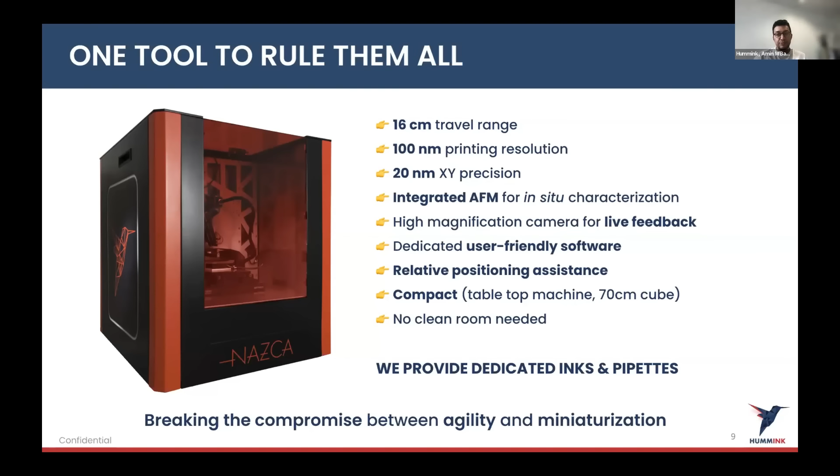I think my time is up. So thank you for the opportunity.

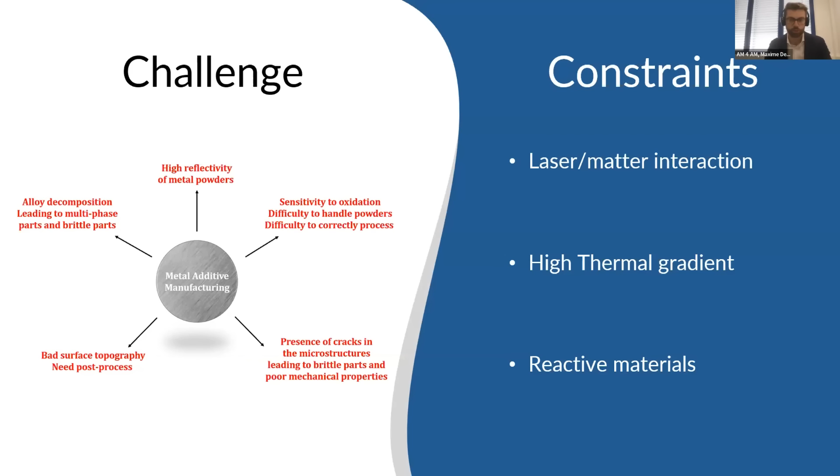Let's have a brief reminder about the challenges metal additive manufacturing is facing in terms of material. We could have difficulties like reflectivity of metal powders, sensitivity to oxidation, difficult to handle powders, presence of cracks in the microstructure due to hot cracking phenomenon, bad surface topography, and alloy decomposition due to high laser power. These challenges come from constraints that laser-based metal additive manufacturing applies, such as laser-matter interaction, high thermal gradient, and reactive materials.

To tackle these constraints, we developed in 2019 an atmospheric cold plasma treatment which allows dispersing ceramic particles on the surface of metallic powder to enhance processability and add new properties to conventional alloys. It's a continuous flux process to graft these ceramic particles. On the micrograph images, all the white dots are grafted particles, so we have a dispersion far better than simple mixing—this is really the added value. Our technology is able to make available hundreds of conventional alloys.

I will show the first one after. We're also creating new alloys designed for additive manufacturing processes, because this way we change the reflectivity and build materials that sustain the high thermal gradient. As I mentioned, it's a continuous flux, so production time is really short, allowing us to develop new alloys pretty quickly. With the R&D equipment and production units we have, we're already able to produce between 6 and 10 tons a year. And cherry on the cake, this process is CO2 neutral—we use no solvents, no chemicals, only nitrogen and electricity to produce our materials.

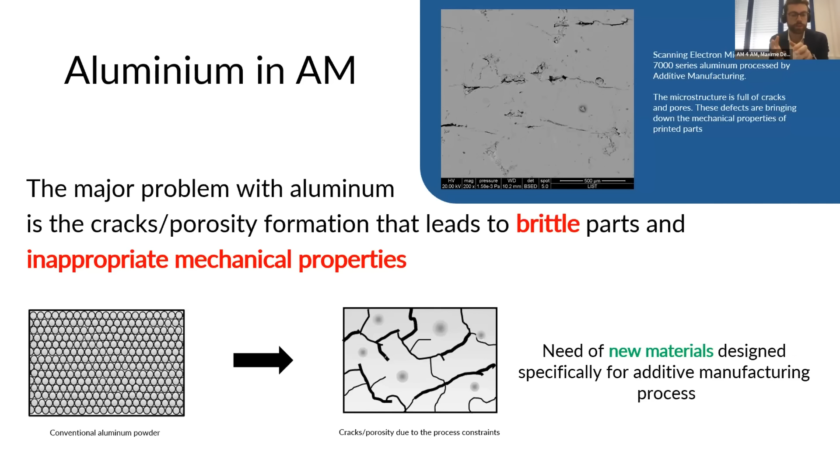...a microscope image full of defects. So it's not possible to use this kind of material to make strong parts, and there is a huge need for new materials designed specifically for additive manufacturing.

Our technology has been applied to these 7000 series to give birth to Hyperall, for high performance aluminium. In the microscope images on top, you can see there are no cracks anymore, porosity is really decreased, we have exceptional mechanical properties, we keep corrosion resistance, and it's compatible with the majority of additive manufacturing equipment.

Looking a little deeper at the mechanical properties, which is really interesting with the 7000 series—if we compare it to the classical aluminium currently printed in additive manufacturing, we are nearly 2 times stronger in terms of yield strength and UTS.

Looking at the main characteristic—the high mechanical strength—we eliminate the hot cracking phenomenon by having cooling that is really more homogeneous, with distribution and dispersion that is completely homogeneous.

Our treatment could be applied to really different kinds of particles, different sizes too. We first chose a size suitable for SLM products. In terms of reflectivity, we were able to decrease the laser power by 30%. This is why our aluminium materials are processable on the majority of additive manufacturing equipment, not only high laser power ones, and we also increase stability because this protective layer of particles reduces oxidation of our materials.

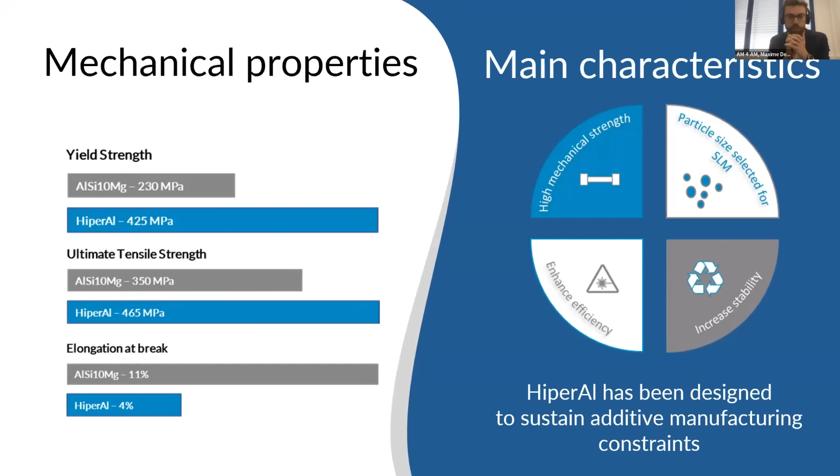So HiperAl has really been designed to sustain the 3 additive manufacturing constraints I presented at the beginning. I was really quick to let the floor for questions, but this is only the beginning for our company. HiperAl is now commercially available, and we are already working on other aluminium alloys, copper too, which is highly challenging due to high reflectivity, nickel superalloy, and tool steel as well. Thank you very much for your attention, I'll be happy to answer any questions.

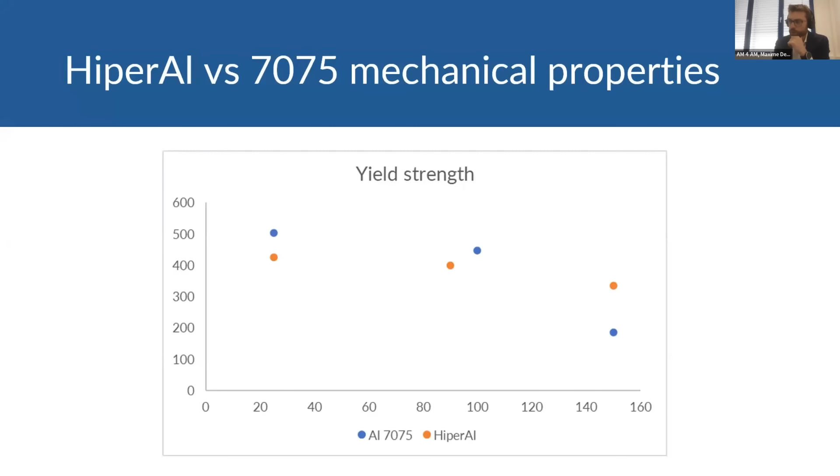So in fact, what is interesting is also the mechanical properties versus the temperature. We noted that compared to wrought aluminium, above 120 we have better mechanical properties than the conventional wrought aluminium, which is exceptional. Same for UTS also, which is exceptional compared to what is on the market right now.

So from my point of view, depending on the properties required, there is space for a lot of different alloys on the market, and I'm pretty sure that HiperAl, which we started commercializing 2-3 weeks ago, will find application in this sector. Is there any process that is more interesting for your material?

Let's say it's laser powder bed fusion, it can be used in different kinds of printing. In fact it has been designed for laser-based processes, to have an optimized laser-matter interaction, that's the first point. Concerning DED or SLM, right now it's designed for SLM, but there's no limitation to work and produce something for DED, it's just not qualified yet, at the moment I'm speaking, but it will be done in the near future.

Okay, good. Wolfgang, please, thank you for your presentation. I have one question: is it necessary to perform a post-heat treatment for this special alloy, or do you achieve the properties directly after printing?